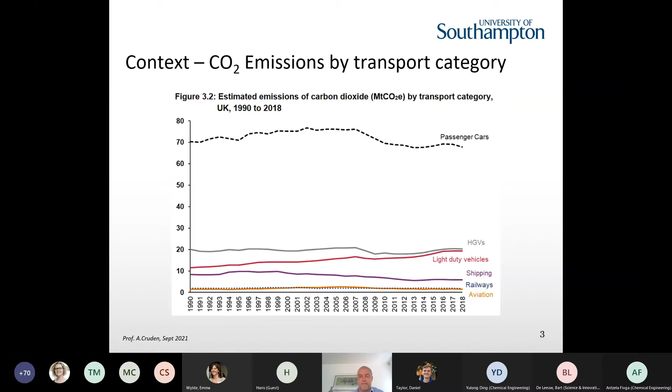Just in terms of scale as well, the global battery demand is expected to increase by some 14 times between now and 2030, a significant rate of expansion, probably 20% average growth per year. The global battery market, by estimate, is thought to be something like $150 billion by 2030. And just to put that into context, if that's the battery market, clearly one element within transport is hydrogen and fuel cells.

Just to give some idea of scale, the global fuel cell market is forecast to hit about 9 billion by 2030. And the market for EV batteries is already 10 times that for grid scale batteries.

I know there's going to be a subsequent talk on more of the grid scale activities in just a few minutes. In terms of performance requirements, I would direct you to some very good roadmaps that the Advanced Propulsion Centre has produced. Let me bring up my pointer and show this automotive roadmap for batteries.

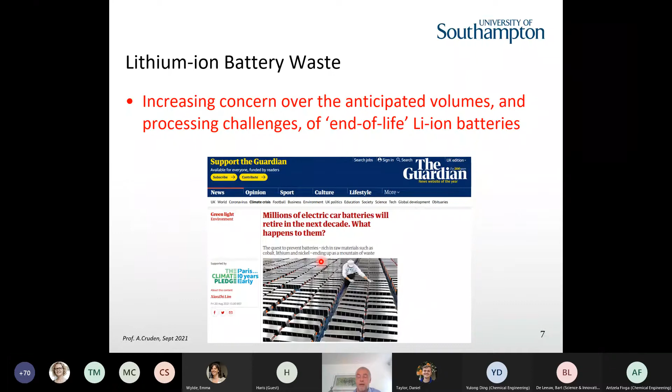One other aspect that's fairly recently been flagged is there's increasing and growing concern over the anticipated volumes and therefore the processing challenges of end-of-life batteries, particularly lithium-ion-based ones. As most manufacturers have announced significant plans to go electric only, and given that a typical vehicle lifetime for a passenger car may only be around 15 years, the processing required to handle end-of-life batteries and ideally recover as much material as possible is critical - and currently we don't really have that capability. This is something we need to address to prevent this material going into landfill or other waste streams, and to make as much use of recovery as we can.

To do that, there's increasing regulation being developed. Only late last year, the EU proposed new rules, and although we're not strictly part of the EU, I'm sure we will follow a number of their regulations and develop our own in a similar fashion to up the targets and rates of collection of batteries, including vehicle batteries. These tend to be fairly straightforward to handle because it's a tracked product from manufacture, licensing through vehicle registration, the V5, the MOT process, to end of life and scrapping. That's regulated, so it's fairly straightforward compared to consumer batteries, which are much more difficult to track.

In terms of upping the rates for battery collection and recovery, taking a battery pack from a vehicle, you then have the outer support and enclosure, all the electronics for the BMS, you might have a thermal management system, and various connections before you actually get into the cells and the elements of recovery. You then have different chemistries to deal with, each with different constituent elements that might be recovered. So legislation is clearly coming to mandate this, and that is a challenge for transport energy storage.

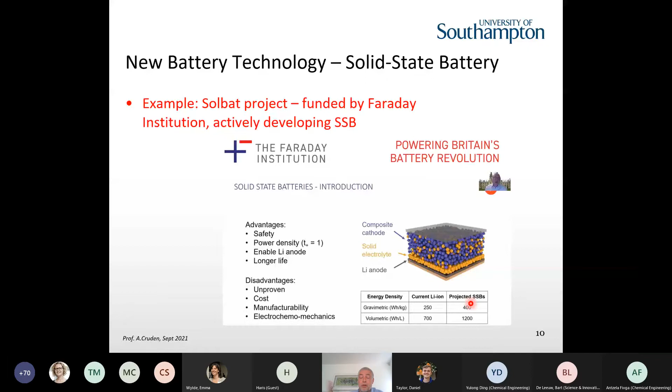Just lastly, to conclude, there does remain a very clear technology race, both in batteries per se, in terms of the different materials used across the range of lithium chemistries, as well as new ones including silicon and sulfur compounds, multivalent batteries, as well as battery versus hydrogen fuel cell technology. There's significant growth in global government support - subsidy is delivering that change, and we can see many reports in the media about this happening right now. I've flagged the waste and processing challenges of end-of-life batteries, and I do think vehicle to grid will enable better linkage between transport, energy storage, and grid energy storage requirements. I'll just finish there. Thank you.

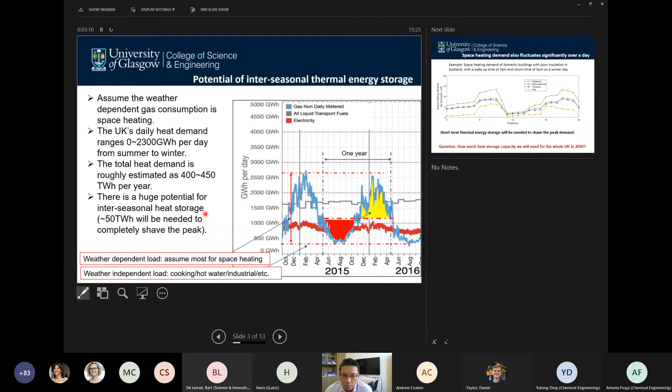And if we zoom further into a day, here we take an example of a few houses or properties in Scotland with relatively poor insulation, and we look at the heat demand over a day. We can see it is not even.

In the early morning, when everyone gets up and before they go to work, there is a peak demand. And also there's another peak demand in the early evening when everyone comes home and before they go to bed. So again there's an uneven demand of heat demand, heat supply, space heating.

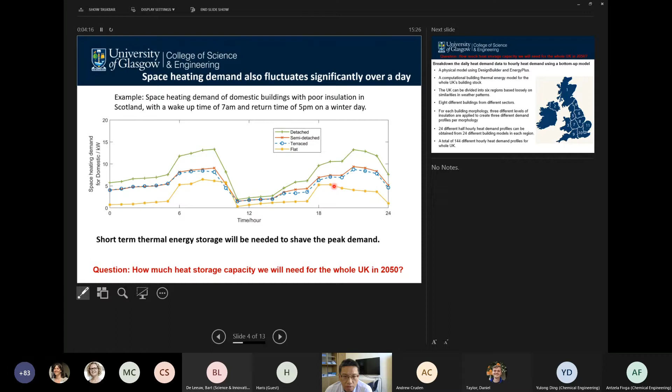And so that will require some sort of short-term thermal energy storage to manage the demand and supply, at least to shave the peak. So now the interesting question for us is how big that scale would be for the whole UK, particularly in 2050, as we target net zero, and the scale of the problem is huge because half of our energy consumption is heat.

So we need to break down the heat demand to hourly or half-hourly data to look at how much heat we will need per day. And so that's what we did — we actually tried to develop a model.

This model takes the whole UK building stock and puts them into a model, a physical model, which we call the bottom-up model, using Design Builder and EnergyPlus. We put all the weather conditions and insulation levels into it. The weather conditions are different from one part of the UK to another, so we split the whole UK into 6 different regions according to their weather patterns. In this way, we can calculate the heat demand for any hour of the day.

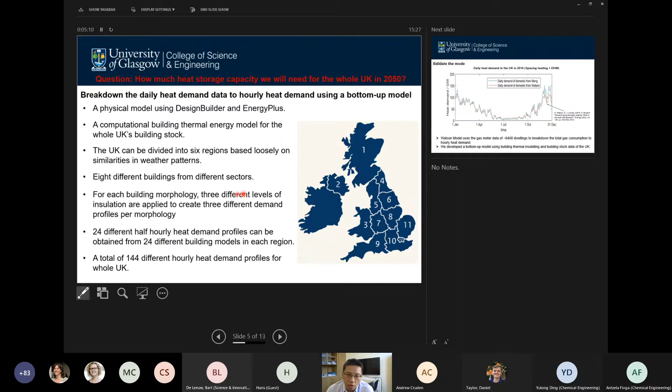For the whole UK, when we add them together, we can roughly work out the hourly heat demand. Before using this model to calculate the heat demand in 2050, we actually used it to calculate the heat demand of 2010, because we knew the gas consumption data, and there's also another model developed by a Loughborough team, Stephen Watson, which already broke down gas consumption to heat on an hourly basis.

But what they did was use an approach where they gathered gas meter data from about 6,000 properties and used that as a reference to break down the total gas consumption to hourly heat demand. But this model has a problem, because you don't have the gas meter data in 2050, so you cannot predict 2050, only analyze historic data.

So we then developed this bottom-up data model to compare with that model and verify it. Here is the comparison between the two models for 2010, and it looks like a very good agreement. So then we got some confidence.

We then used this model to find out the hourly heat demand data, let's say starting with 2010 — a very cold year in recent years. We worked out the peak heat demand is in January, a particular day with about 300 gigawatts. The total heat demand of the whole year, including both space heating and domestic hot water, is estimated as around 415 terawatt hours.

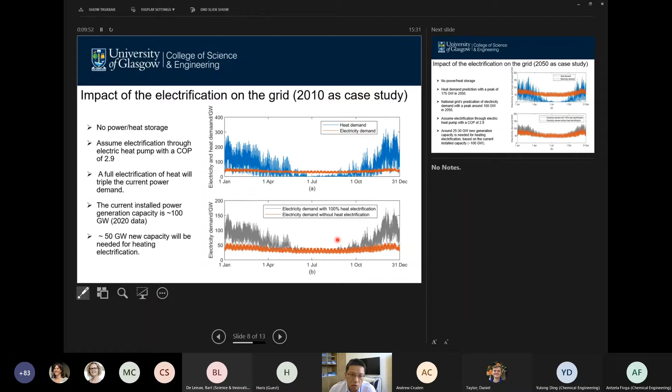So that doesn't work. We need to consider storage and flexibility to shave the peak demand.

If we put this in the scenario of 2050, according to the prediction we made, what it will look like is the heat demand peak in January will be 170 gigawatts, somewhere in that range. The National Grid also predicted the electricity demand in 2050 will be around 100 gigawatts.

But that has already taken into account the electric vehicle, though I'm not sure whether they've already taken into account the heat pump electricity consumption.

So it's uncertain there. If we now convert all the heat demand through heat pumps with a COP of 2.9, we divide the blue line by 2.9 and add the orange line. We end up with total electricity demand with a peak demand of about 130 gigawatts.

Again, if we compare with today's 2020 installed capacity of 100 gigawatts, we are still talking about needing to install another 25 to 30 gigawatts of power generation capacity just for the heat pumps. Again, this is huge, and it's probably not feasible or viable in terms of scale.

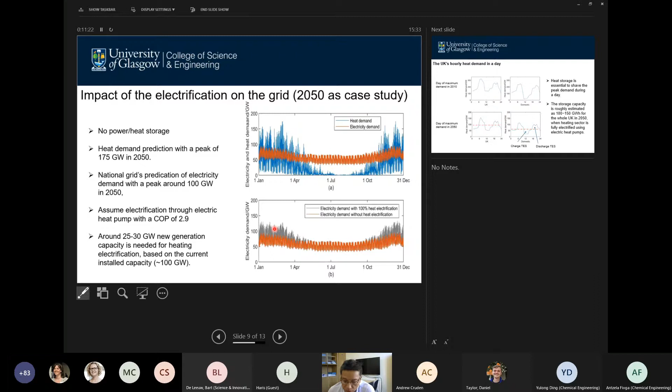So what we'll actually do now is look at a particular day - let's say the maximum heat demand day for the UK in 2050. What you can see is the heat demand fluctuates very significantly over the day, with a big peak in the morning time and the early evening time.

So are we going to use electricity anytime we want, or can we use the heat pump to produce heat the whole day but store it when we don't need it? In that case, we can somehow shave the peak demand and reduce the impact on the grid.

So when we look at this, we can roughly estimate the scale. According to this diagram, the domestic heat, including space heating and hot water in 2050, gives us a figure of about 100 to 150 gigawatt hours of heat storage we would need to shave this peak.

That gave us roughly the idea of how much heat storage we will need in 2050 to shave the peak of the heat demand in the domestic sector, from the perspective of heating decarbonization or electrification.

As global warming kicks in, the temperature will increase, and another headache will come: cooling. Particularly this year in the south, in London, cooling was a big problem. A report recently published by UKERC, also involving the University of Birmingham, estimated that in 2050, in the highest scenario, electricity demand in the early evening will increase by 7 gigawatts, adding to the problem we just explained in the heating sector.

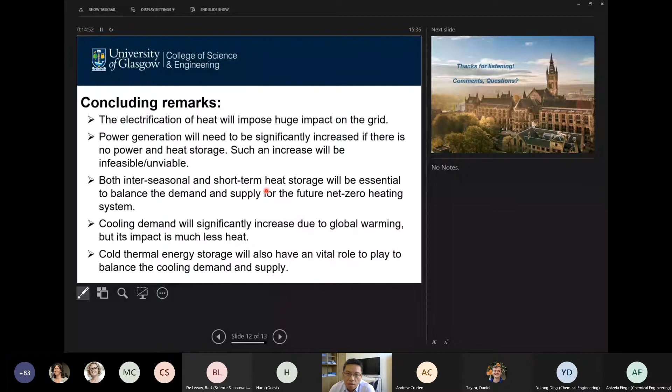Cooling will impose some challenges, but less than the heating problem. Again, cold thermal energy storage can also play a big role in the future net-zero cooling system. Thank you very much, I think I need to stop now.

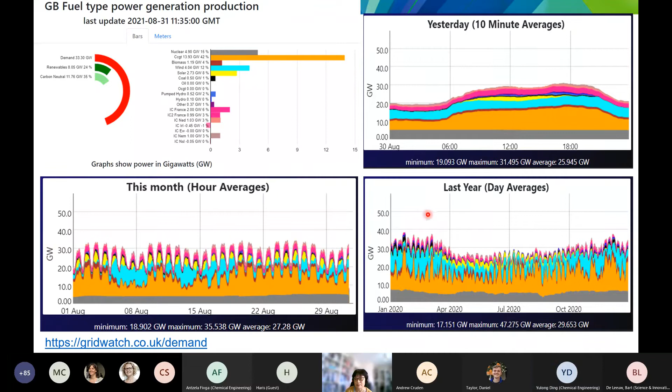With the cost, that indicates the need - this need is trying to balance the grid generation and the usage. So we need some energy to be dispatchable, and traditionally all this has been done by fossil fuel. We store energy in the fossil fuel.

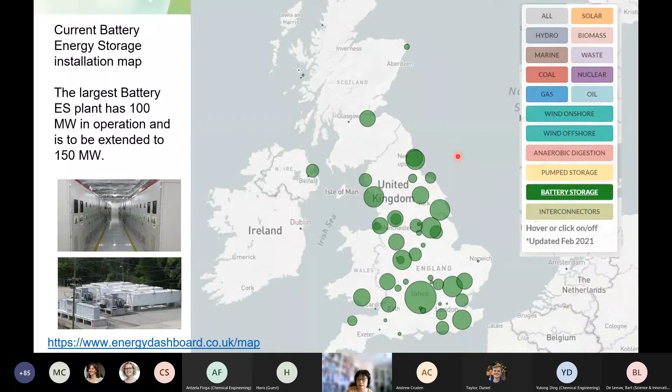So all this battery storage need, with a good market, attracts investment, and it's going well in the UK. But all this really serves the daily, second, and instant balance of the grid. When we look at 2050 and achieving net zero, we're really trying to get rid of this brownish color in our generation, to get rid of all fossil fuel and use all clean energy.

But when you look at the wind, this blue line, in early August last month, and for a few days, we didn't have much wind. In that case, energy storage for short-term storage and balancing service is probably not enough to change this gray area in our generation into green or other colors.

So for deep decarbonization, we need more strategies or other types of energy storage. Here's another simple diagram. At the moment, that's our greenish energy generation, that's the demand, and in between we use other types of energy to balance.

In the future, if we have a lot of non-dispatchable sources from renewable and clean energy, we have a problem, because that's our demand, and sometimes we need a very big gap between this demand and generation. We could simply install more and more power generation plants, not just to meet peak demand but much more than peak demand, but that's very costly and gives you a very low capacity factor, using only a very low percentage - not economic.

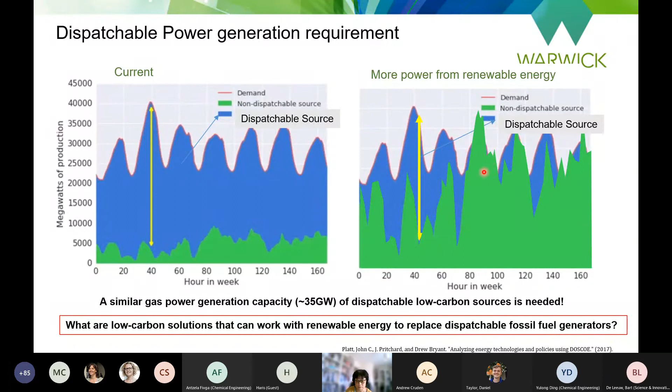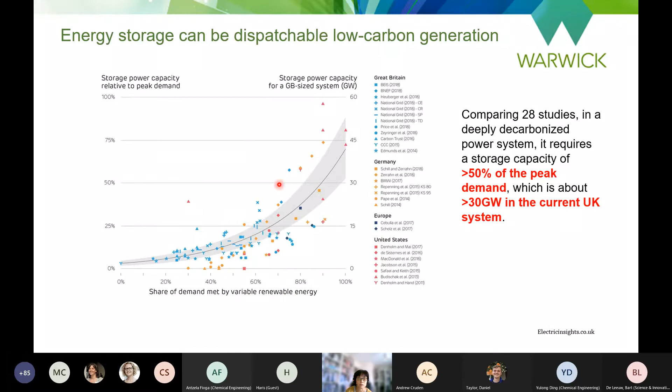So that means, in addition to this short-term fast response grid balance energy storage, we need long-term and long duration storage. This study indicated that when we increase the percentage of renewable energy, the energy storage we need will increase as well, and not just short-term, but daily, weekly, and seasonal - however many hours you need to store.

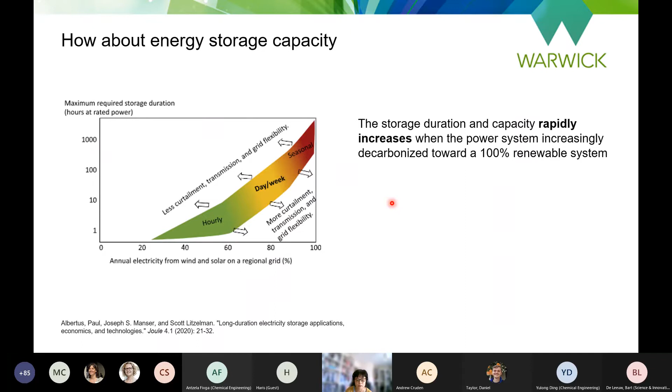So to achieve net zero in 2050, energy storage is definitely inevitable, even with high terawatt hours of hydrogen energy storage or energy available, we still need those big energy storage solutions.

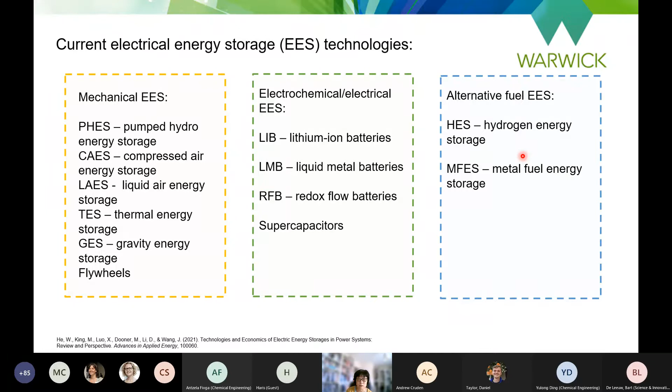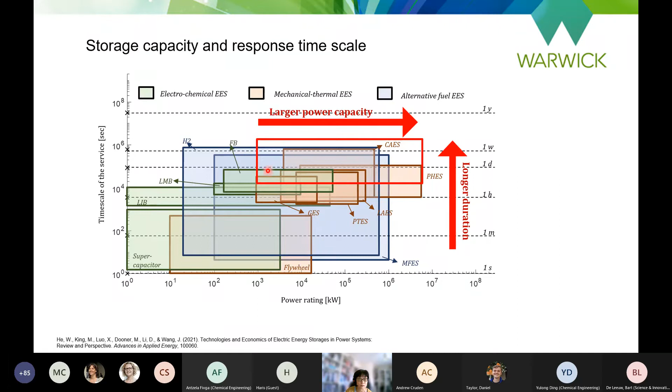So, looking at energy storage technology, there are various options, and this figure compares the time and capacity, showing which technology is more suitable for which area or purpose of usage. When we look at large and long duration energy storage, there are various technologies: compressed air, liquid air, pumped hydro, other thermal storage, hydrogen - quite a lot of technologies. And of course, any technology comes with a cost.

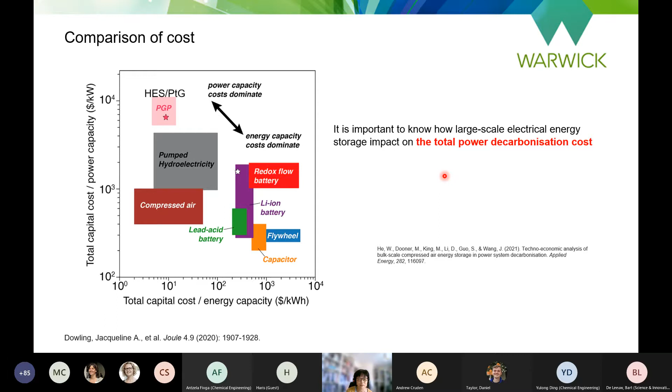So that's a comparison of capacity, cost, and various technologies. With these comparisons of cost and capacity, we definitely need more study to see which ones give better solutions.

There's a recent paper we published. They did some initial studies, and I'll certainly use this opportunity to say a few more words about compressed air energy storage.

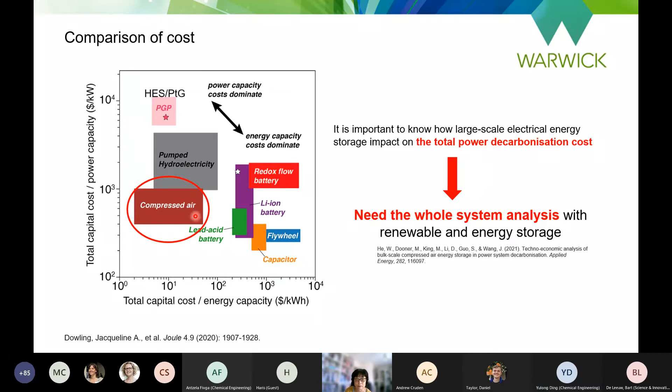Compressed air energy storage uses electricity to run a compressor, increasing air pressure to store energy, and then generates electricity when needed.

This compressed air energy storage has two kinds of weakness. One is low energy density. But when we look at the UK, we have a lot of salt cavern deposits.

Ji-Hong, I think you're muted. If you could just unmute yourself. Oh, okay, sorry, now we can hear you. I think I moved my headphones. That's the problem. All okay now. No worries.

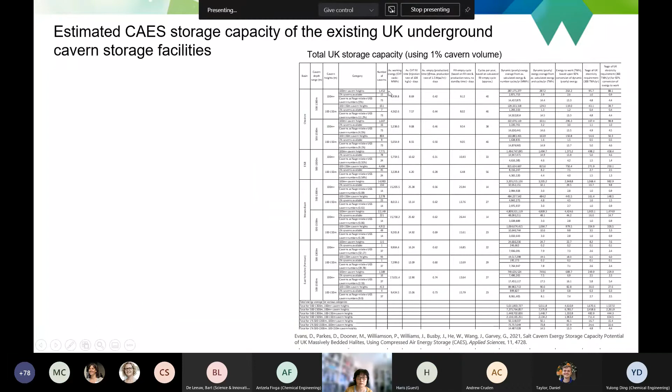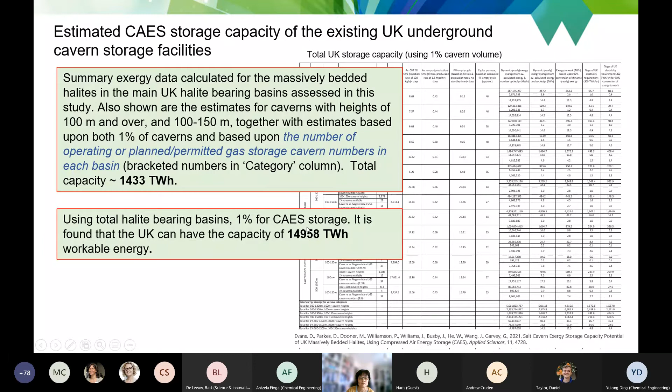So that's the UK. We did a study with the British Geological Survey on UK potential. We have rich salt deposits that could be engineered into salt caverns to store compressed energy. Even using just 1% of this, we would have terawatt-hours of storage capacity, using existing caverns already potentially available in the UK.

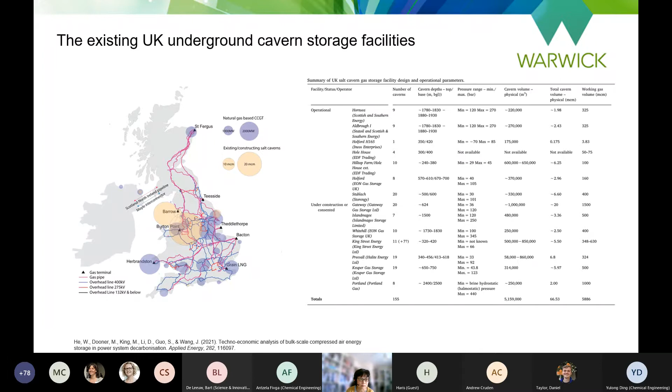Based on this, we did another study assuming we use existing caverns to store compressed air, suppose we have compressed air energy storage in place to replace current gas power plants, and calculated how much energy we could provide to replace these plants. That's also in the paper, and there's a new paper published recently on the salt cavern potential.

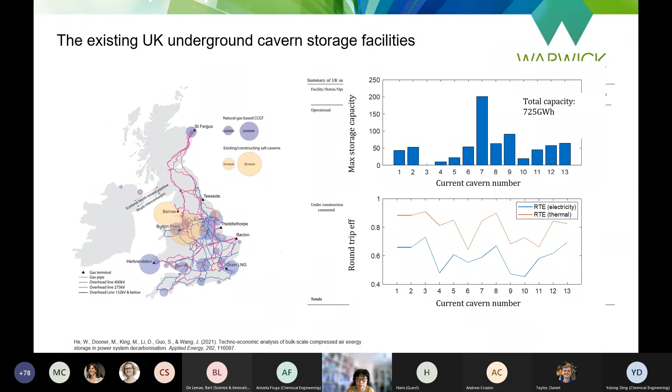To end this presentation, there's no doubt we need massive energy storage at various scales and durations to achieve net zero by 2050.

For fast response energy storage, the market is viable in the UK and a lot of people want to invest in it. I have three past PhD students working in this area - two are building storage plants, and one is operating and maintaining a plant.

So there is a good market, but we need large scale and long term storage to achieve this goal for energy storage. But the market proposition is not clear.

For the recent long duration call from BEIS project, one company was interested. We worked together initially trying to put a proposal in, but after all the financial calculations, they felt it would take too many years to get the investment back, and didn't submit the project.

So I think for long duration storage, the UK still needs to think about how we can make a little bit of change to favor various technologies to put in place for the 2050 net zero goal. Okay, I'll stop here.